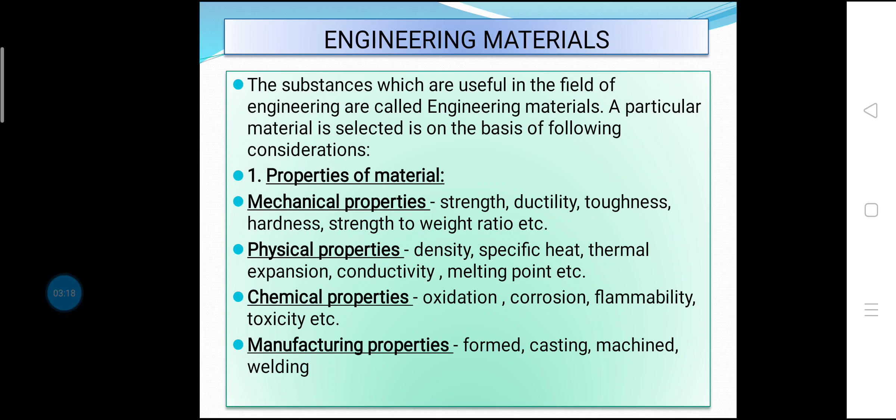Under chemical properties, there are oxidation, corrosion, flammability, toxicity, etc. Under manufacturing properties, there are forming, casting, machining, and welding. Other considerations are cost of material, availability of material and reliability of supply, service life of material, and appearance of material. This is all about the introduction part of mechanical properties of materials.

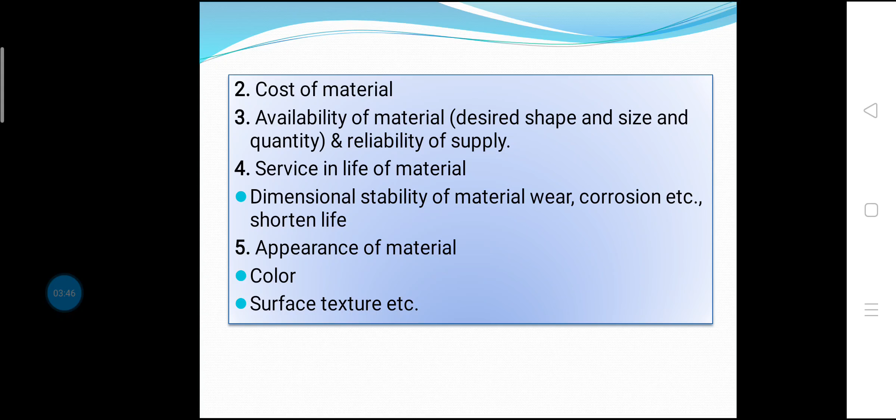Now let us discuss the various types of engineering materials. Engineering materials are classified into two types, metals and non-metals. Metals are classified into two types: ferrous materials that contain iron, and non-ferrous materials that contain no iron. Ferrous materials are classified into four types: wrought iron, carbon steels, alloy steels, and cast irons. Non-ferrous materials are classified into six types: aluminum, copper, lead, silver, tin, and zinc.

Non-metals are classified into two types, polymers and ceramics. Polymers are classified into two types, thermosetting polymers or plastics and thermoplastics. Thermosetting polymers are classified into three types: phenol formaldehyde, polyesters, and epoxy resins. Thermoplastics are classified into four types: polyvinyl chloride, that is PVC, polythene, acrylic, and resins.

Ceramics are classified into five types: refractories, abrasives, glass, cement, and concrete. These are the basic classification of engineering materials. Now let us discuss one by one.

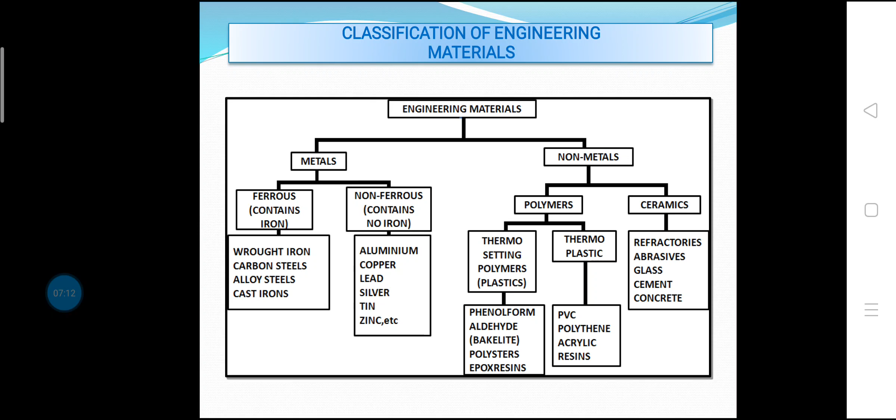Let us discuss mechanical properties of materials. The characteristics of a material that describe its behavior under the action of external loads are referred to as its mechanical properties. The common mechanical properties are: strength. The term strength may be defined as the property of metal by virtue of which it can withstand or support an external force or load without rupture.

The strength of a metal is the most important property, which plays a decisive role in designing various structures and components. Types of strengths. First, tensile strength. The tensile strength is defined as the ability of material to resist a stretching load without fracture, or you can say that the tensile strength of a metal is the value of load applied to break it off by pulling outwards into two pieces. Mathematically, tensile stress is the maximum tensile load divided by the original cross-sectional area.

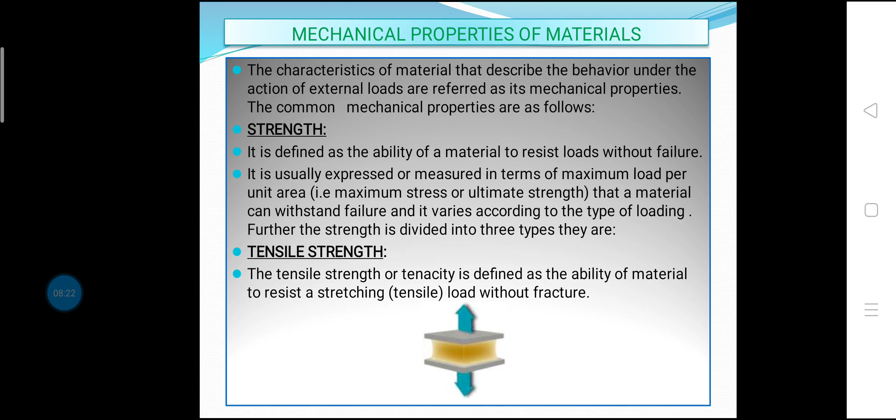Next, compressive strength. The ability of a material to resist squeezing or compressive load without fracture is called compressive strength. Or you can tell that the compressive strength of a metal is the value of load applied to break it off by crushing. Mathematically, compressive stress is equal to maximum compressive load by original cross-sectional area.

Next, shear strength. The ability of a material to resist transverse loads, that is loads tending to separate or cut the material, is called shear strength. Or you can tell that the shear strength of a material is the value of load applied tangentially to shear it off across the resisting section. Mathematically, shear strength will be equal to maximum tangential load by original cross-sectional area.

Next, stiffness. What is stiffness? The term stiffness may be defined as a property of a metal by virtue of which it resists deformation. Within the elastic limit, stiffness is measured by the modulus of elasticity. It is the measure of stiffness of a metal.

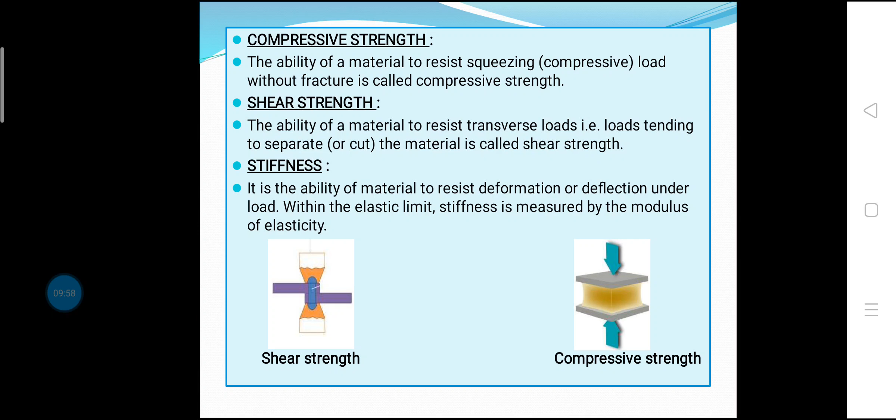The stiffness of a metal is of great importance while selecting it for a member or a component of a machine or a structure. It is also used in graduating spring balances and spring control measuring instruments.

Another important mechanical property of metals is elasticity. The term elasticity may be defined as the property of a metal by virtue of which it is able to regain its original shape and size after the removal of the load. In nature, no material is perfectly elastic over the entire range of stress up to rupture. Steel and some other metals have a wide range over which they appear to be elastic. The elasticity is always desirable in metals used in machine tools and other structural members.

Another important mechanical property of metals is plasticity. The term plasticity may be defined as the property of a metal by virtue of which a permanent deformation without fracture takes place whenever it is subjected to the action of external forces. The plasticity of a metal depends upon its nature and the environmental conditions, that is, whether the metal is shaped red hot or in cold.

Most of the metals have been found to possess a good plasticity. Lead has good plasticity even at room temperature, while cast iron does not possess any appreciable plasticity even when red hot. This property finds its use in forming, shaping, and extruding operations of metals.

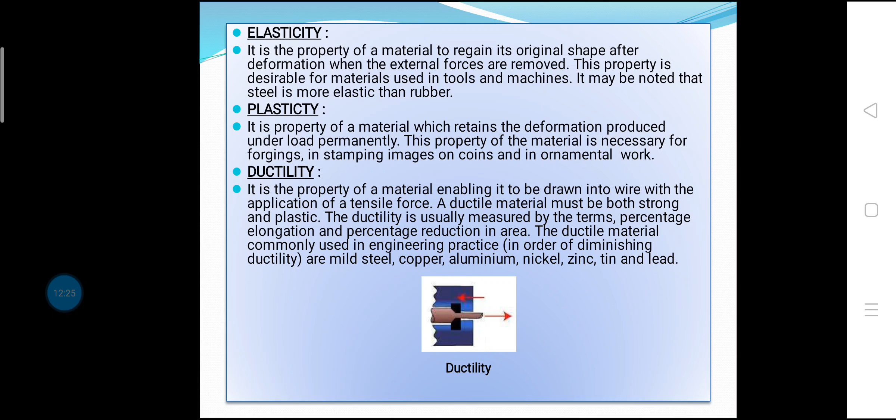Another important mechanical property of metal is malleability. It is a special case of ductility which permits materials to be rolled or hammered into thin sheets. A malleable material should be plastic, but it is not essential to be so strong. The malleable materials commonly used in engineering practice are lead, soft steel, wrought iron, copper, and aluminium.

Another important mechanical property of metal is toughness. It is the property of a material to resist fracture due to high impact loads like hammer blows. The toughness of the material decreases when it is heated. It is measured by the amount of energy that a unit volume of the material has absorbed after being stressed up to the point of fracture. This property is desirable in parts subjected to shock and impact loads.

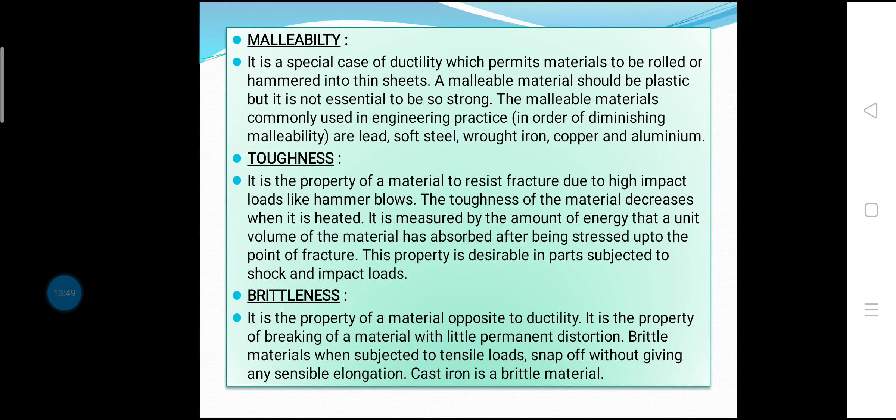Another important mechanical property of metals is brittleness. It is the property of a material opposite to ductility. It is the property of breaking of a material with little permanent distortion. Brittle materials, when subjected to tensile loads, snap off without giving any sensible elongation. Cast iron is a brittle material.

Next, hardness. Hardness is another important mechanical property of metals. One of the most simple and useful properties of metal is that of hardness. The term hardness is used to designate several qualities of a metal. Hardness may indicate resistance to abrasion, scratching, cutting, or shaping. It may denote strength, stiffness, brittleness, resilience, toughness, or combination of these properties. Its meaning depends upon the material and on the use to which the material is to be subjected.

The hardness of a material usually implies the resistance to deformation or indentation. It is an easily measured quantity. There are three general types of hardness measurements depending upon the manner in which the test is conducted. These are scratch hardness, indentation hardness, and rebound hardness.

Let us discuss scratch hardness. Scratch hardness determines scratching and abrasion ability of a metal when scratched by a standard substance. The standard substances are either minerals or files. Some minerals have been given hardness numbers from 1 to 10 on the Mohs scale.

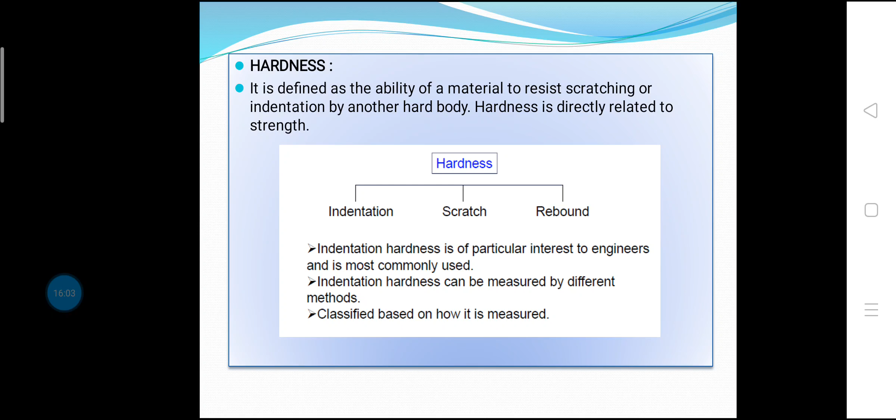Last one, rebound hardness. The rebound hardness is measured using a Shore scleroscope. This hardness tester is entirely different in principle from other machines such as Brinell, Rockwell and Vickers. This test measures the rebound of a weight that is dropped onto the specimen.

Creep is another important mechanical property of materials. When a part is subjected to a constant stress at high temperature for a long period of time, it will undergo a slow and permanent deformation called creep. This property is considered in designing internal combustion engines, boilers and turbines.

Another important mechanical property of metals is fatigue. When a material is subjected to repeated stresses, it fails at stresses below the yield point stresses. Such type of failure of a material is known as fatigue. The failure is caused by means of a progressive crack formation, which are usually fine and of microscopic size. This property is considered in designing shafts, connecting rods, springs, gears, etc.

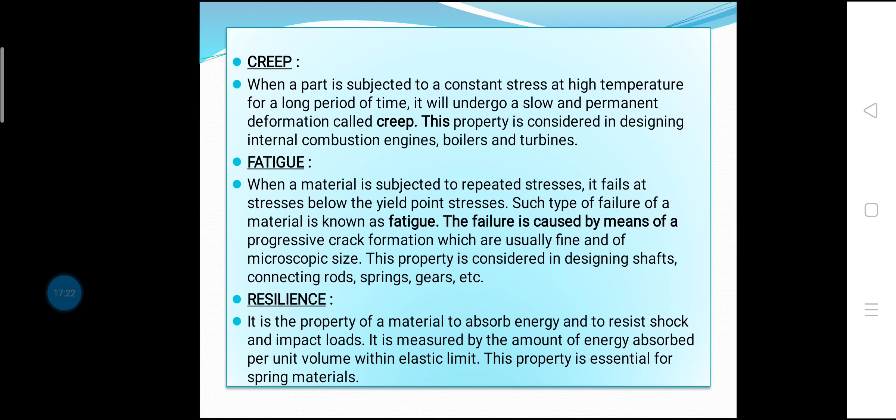Resilience is another important mechanical property of metals. It is the property of a material to absorb energy and to resist shock and impact loads. It is measured by the amount of energy absorbed per unit volume within elastic limit. This property is essential for spring materials.

There are other important mechanical properties: machinability, weldability, castability and strain hardening. Let us discuss one by one. Machinability. It is the property of a material which refers to the relative ease with which a material can be cut. The machinability of a material can be measured in a number of ways, such as comparing the tool life for cutting different materials, or thrust required to remove the material at some given rate, or the energy required to remove a unit volume of the material. It may be noted that brass can be more easily machined than steel.

Weldability. It is the ability of a material to be joined by welding. Weldability depends on chemical composition, physical properties and heat treatment to which they are subjected. Castability. Castability of metal refers to the ease with which it can be cast into different shapes and is concerned with the behavior of metal in its molten state. The various factors affecting the castability of a metal are solidification rate, gas porosity and shrinkage.

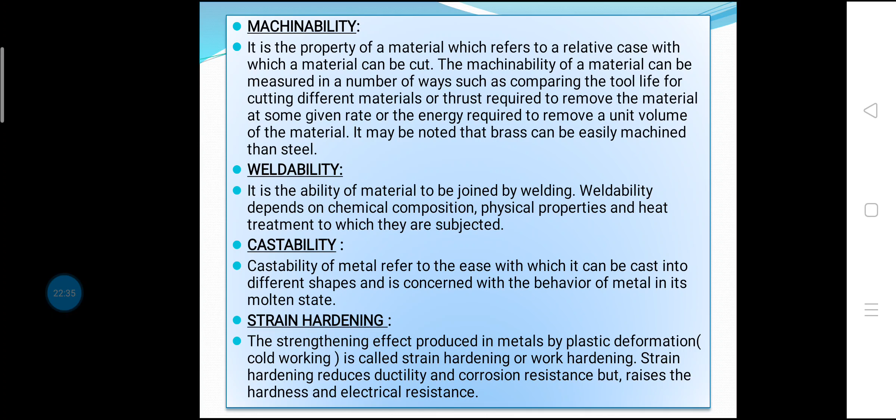These acids act as electrolyte. This results in the formation of an electrochemical cell in which electron current starts flowing from the exposed metal through the electrolyte to the other regions of the metal which are still protected. It has been observed that the atmospheric exposure of a metal decreases the tensile and fatigue strengths of a metal. These are the main factors that affect the mechanical properties of a metal: grain size, temperature, heat treatment and atmospheric exposure. This is all about mechanical properties of metals.